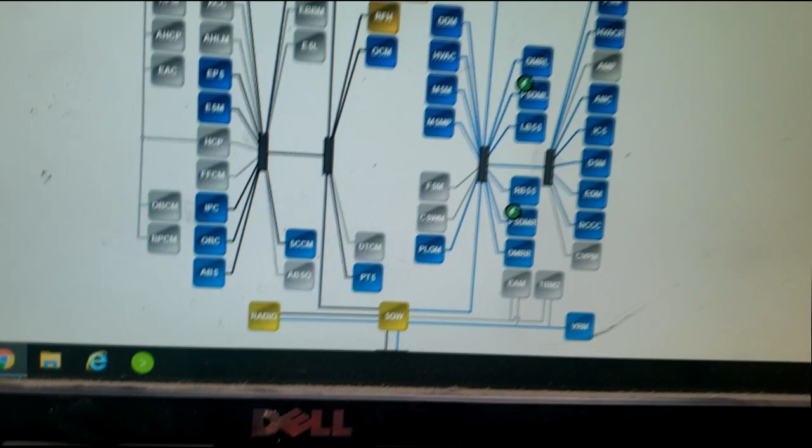Yes, I have my scan tool pulled up, and as you can see, guys, this is a 2020 Chrysler Pacifica. The Dodge Grand Caravan is history - there's no more, they're done making them after 2020. Transmission it goes into neutral. Now on my test drive I could not duplicate it, but she said when she comes to a stop, it tends to go into neutral. Now what you want to do, because this is a fully electronic transmission, you have to have a scan tool, guys. There's no way around it.

Now, as we can see, guys, there's yellow. Yellow typically indicates fault codes in those modules. Here's TCM - there is no fault code in this module because it's blue. However, there's a lightning bolt, and that lightning bolt represents a flash update.

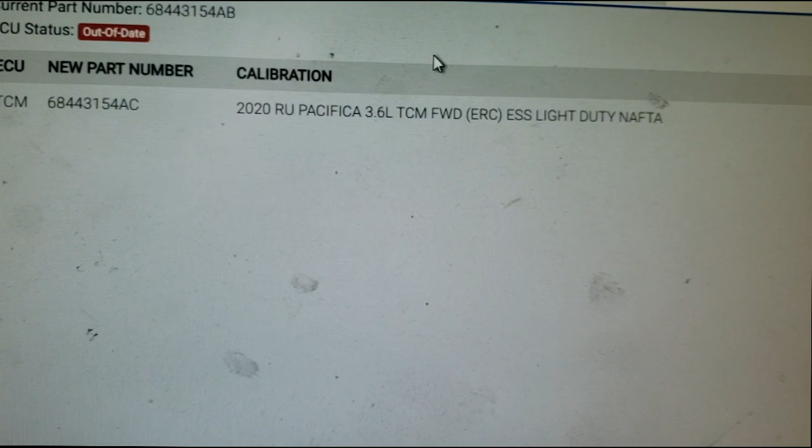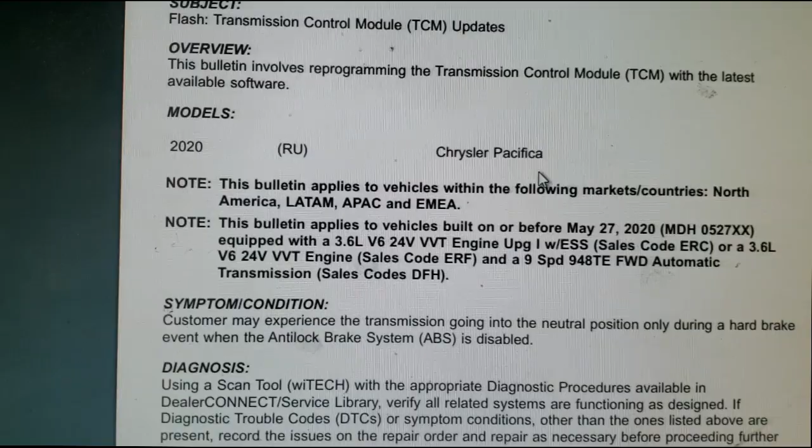Okay, now let's take a look and see exactly what this TSB wants me to do. Yes, this TSB applied to this car, a 2020 Chrysler Pacifica. Customer may experience transmission going into neutral position only during a hard brake event when the antilock brake system is disabled. She didn't say anything about hard braking, she said coming to a stop, so I assume if she's hard braking, it's the same thing. Their complaint is never gonna match this.

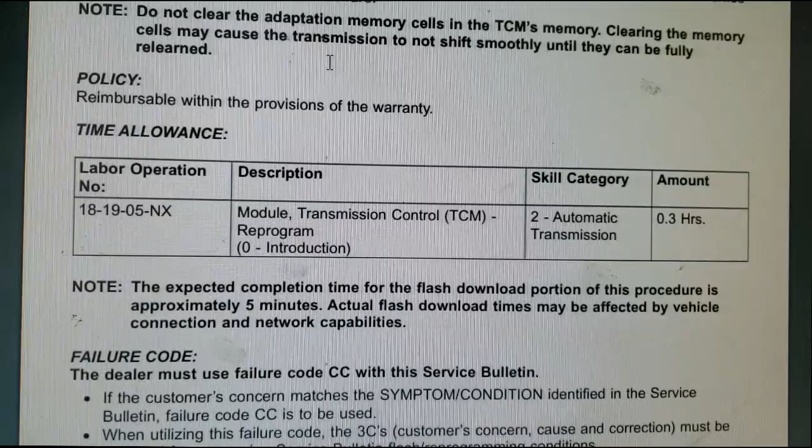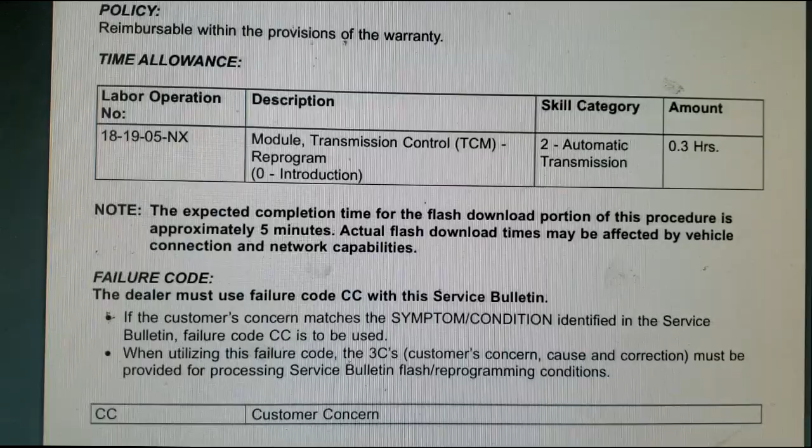You as the mechanic have to put two and two together. So guys, pretty much this flash update will address this problem. What they want me to do is flash update the TCM. Because this is a 9-speed ZF transmission, it has its own TCM. So I am required, since this car is still under warranty, to simply flash update this module, guys.

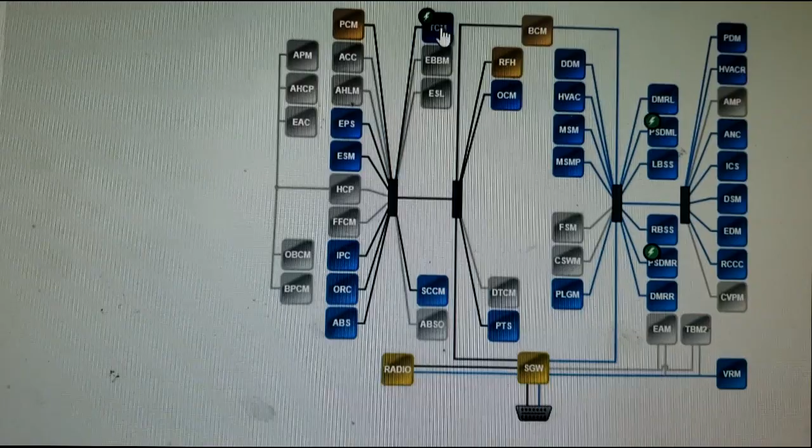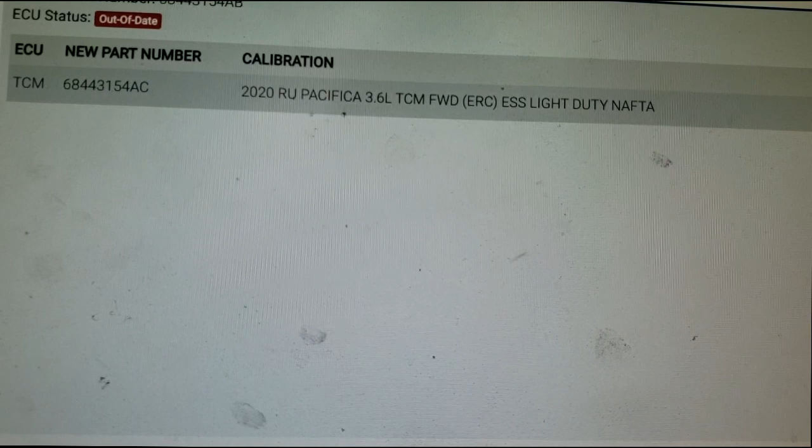So keep in mind, the whole purpose of this video is to remind you guys that these are fully electronic transmissions. So any complaint pretty much has to go through the computer. The computer's gonna try to diagnose it first. Now it could be a hardware issue or a software issue, we don't know until it's properly diagnosed. In this case, it turned out to be a software issue. So all I'm gonna do, guys, is flash update this TCM, then go drive it again and verify if it's fixed.

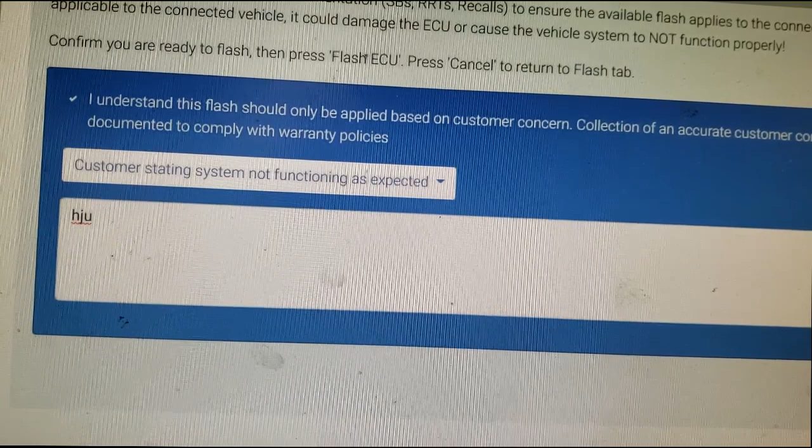Pretty much, guys, everything from 2017 and up, most of your diagnostic is going to be done... well, I take that back, it's even lower. A lot of the diagnostic nowadays is being controlled or handled by the computers, up to a point. Mechanics are still needed. There will still have to be physical mechanics to properly diagnose these cars. There's only so much the computer can do.

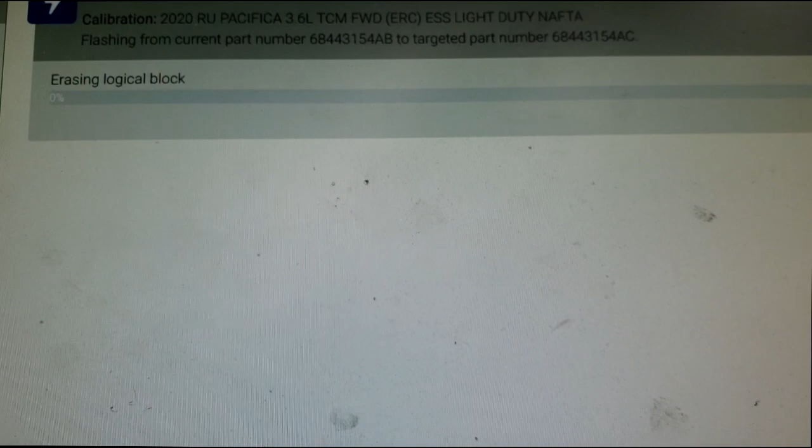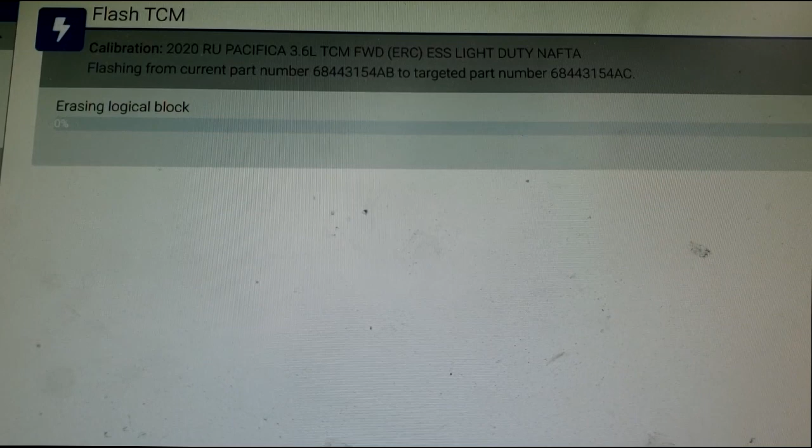But my point to you new guys is first thing first, scan the car. Test drive and verify, but you really need to scan it. Remember the typical old days where we check the fluid first? This is a 9-speed transmission, you have no way to check the fluid. There's no dipstick or dipstick tube. So the typical way of diagnosing transmissions is slowly changing, guys, and we as technicians, mechanics, we have to adapt.

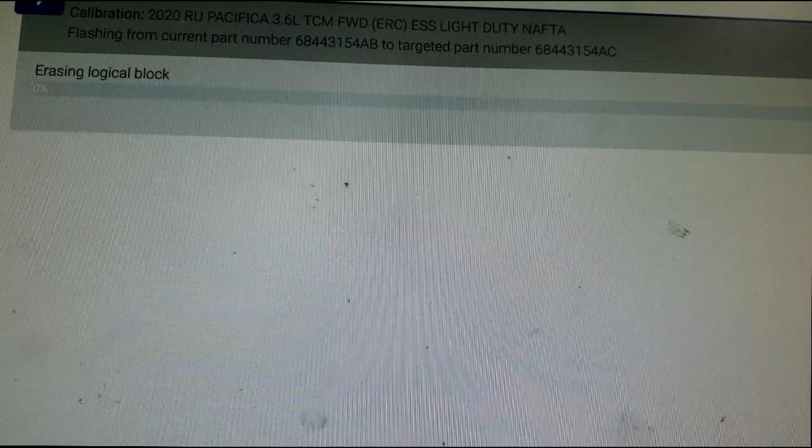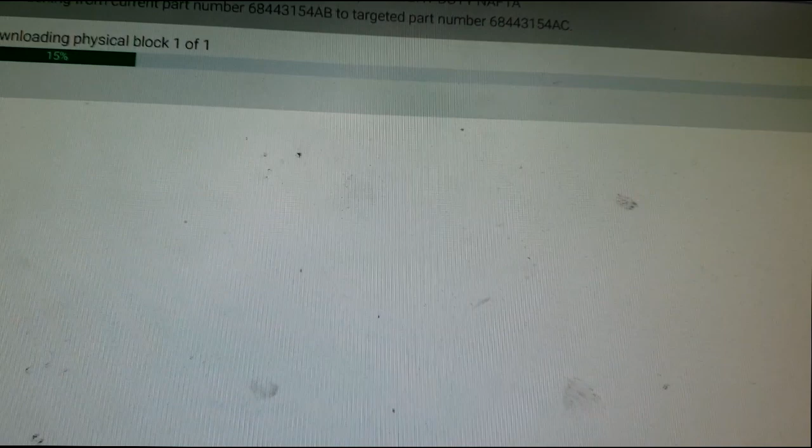All right, mostly all the new cars, the 8-speed ZF transmission that's inside the newer model Jeep products, there's no dipstick on it or dipstick tube. So the thinking behind that goes, it's a fill-for-life trans, and if you don't see any leaks, you're obviously still full from the factory. I do not agree with that, but who am I? I have to go by the rules laid out before me, so I adhere to those recommendations. I look under it, if I don't see any oily substance, there's obviously no transmission leaks, which I'm supposed to comprehend as the transmission being full. Yes, how crazy does that sound?

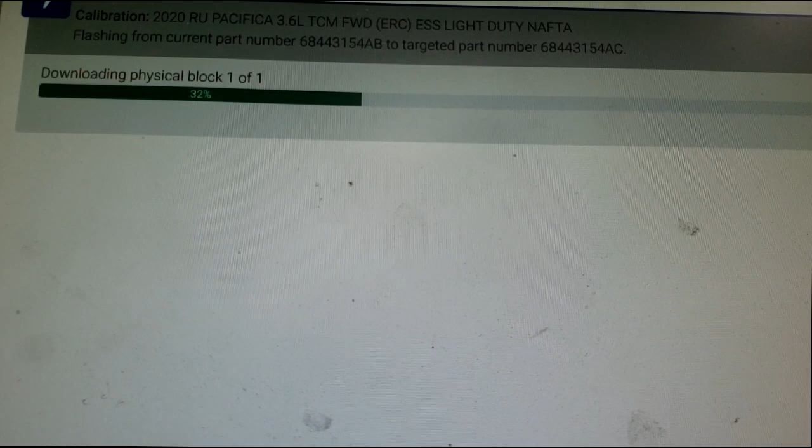You know, mechanics want to grab the dipstick, grab a rag, they want to smell the fluid, they want to do all sorts of things, but those days are slowly going behind us, guys. We have to adapt, and if you find yourself out there without a scan tool, it's going to be extremely hard.

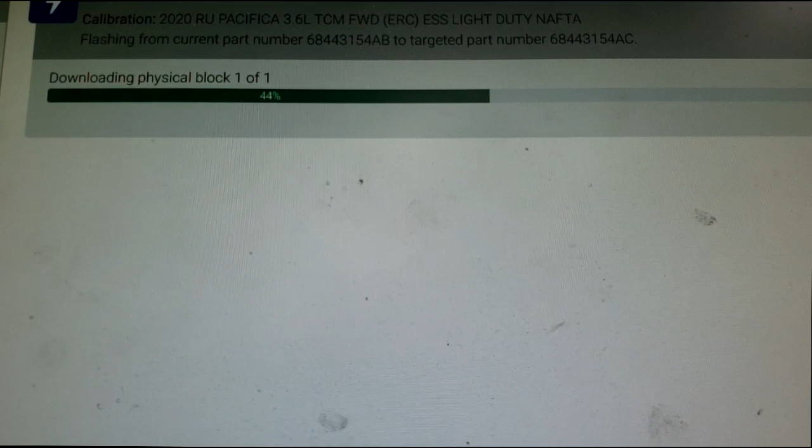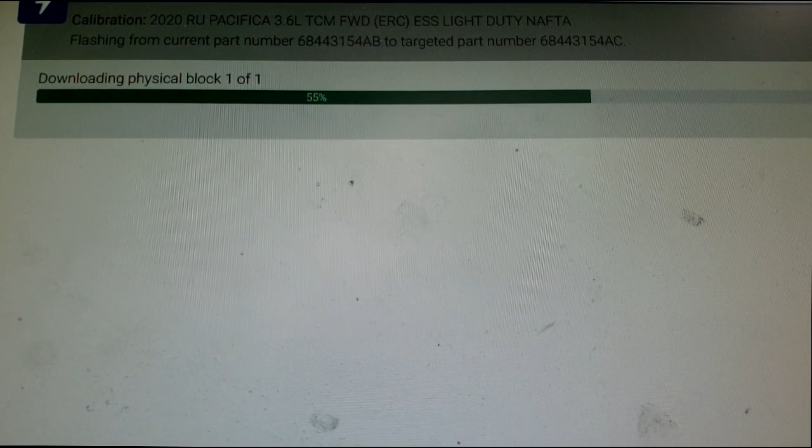Now again, this is a 2020, so it's still under warranty, but the same theory applies. Your car needs to be scanned first before you do anything, and most importantly, your car has to be scanned for the proper software update. If the software is not up to date, you can have all kinds of problems, because you'd be surprised how well a software update can affect shift points, banging in the gear, the complete shifting in essence. But a lot of people don't take that as serious as they should. They rush to go in and complain about the transmission, and mechanics, if they don't know any better, would overhaul or replace it when it could simply be a software update.

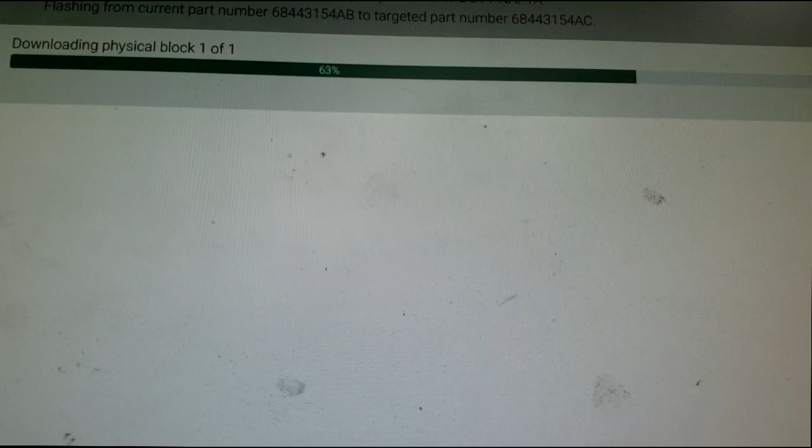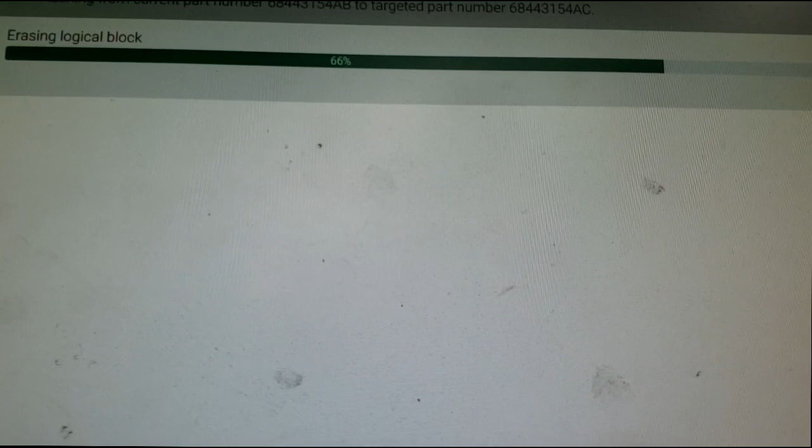All right guys, so I'm gonna complete this flash update. This computer is flashing. Flashing is merely removing software out of the controller. All computers now have flash EEPROMs, so we're merely reinstalling updated software. Depending on what the changes are, those changes will be applied to your vehicle after the software update is done. So can't belittle the importance of a computerized flash update.

I've seen these simple updates repair all kinds of things, guys, so it's very much needed. In fact, if I'm doing a tune-up or a trans service, I update the controllers, their respective controllers anyway. With a tune-up, the goal is to get the car to drive the way it did when it was new. So why not go ahead and update the controller?

All right guys, we're just about done with this flash update. I'm gonna pretty much wrap this video up. I've talked enough, that's all I have.